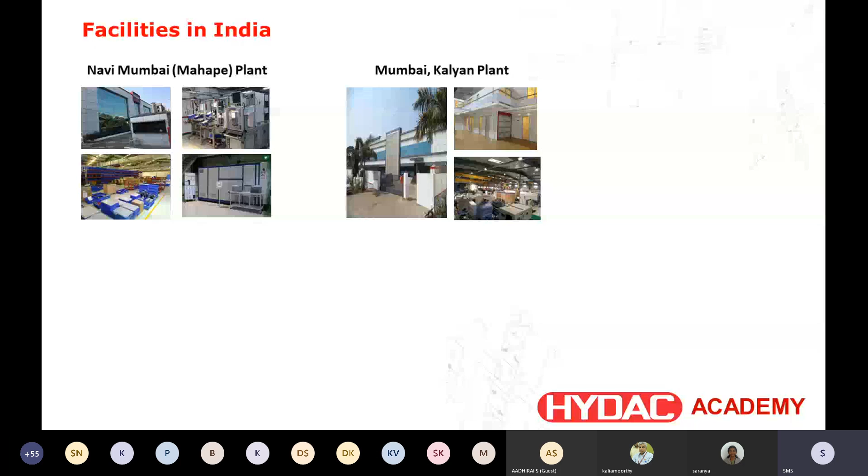So as I told, we have got 5 manufacturing plants. Out of which two are based in Maharashtra, that is in Mumbai, and we have got one manufacturing plant in Bangalore which manufactures a particular component alone, plus two more plants we have in Coimbatore.

So one plant is completely functional. The other plant was supposed to be inaugurated by mid of 2020, but due to the ongoing pandemic we have slightly delayed it. Probably by the fourth quarter of 2020, this plant will be inaugurated, which is the biggest plant for HYDAC in India.

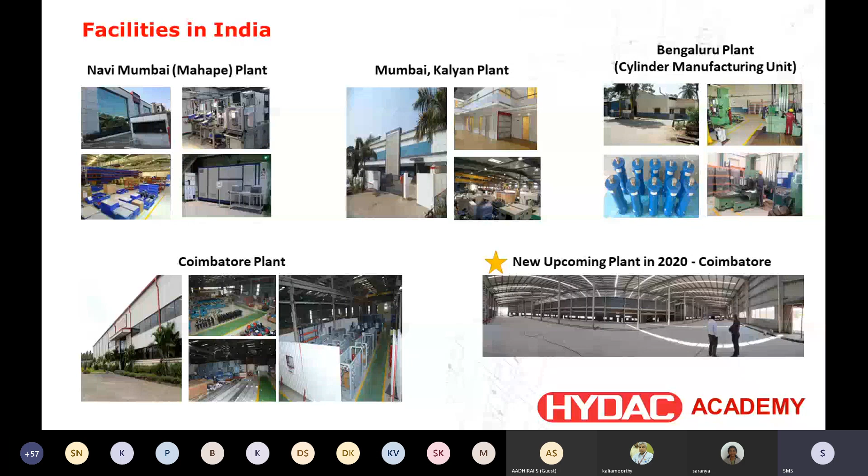So HYDAC Academy, when we say this, we are catering to various training aspects, whether it is for industries or for engineering colleges and universities. So we have come up with some very unique concepts where the basic technologies are most required, but at the same time these basic technologies should be scalable to the present generation technology, which is Industry 4.0.

So we have come up with training systems for Industry 4.0. At the same time, we are also converting the conventional training systems to Industry 4.0 as well.

So now let us get along with our topic. Today's topic is emerging trends in automation technologies. The word automation has got huge sub-branches under it. So what is basically automation?

If I have to tell this in a very simplified way, industrial automation is the use of control systems. When I say control systems, this can be a lot of other components which cater to the automation industry, just for examples like a computer or a robot or an IT platform and various other technologies which actually do the work. So when I say do the work, it can be something like your hydraulics or your pneumatics or your electrical actuators, which can be your motors or linear motors, solenoids, and all these things. So everything put together.

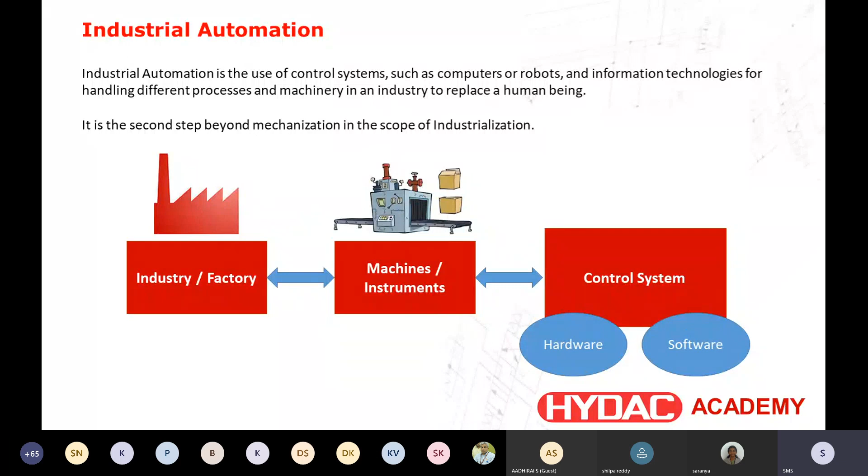So a machine with a control system in which different technologies are combined together to do a particular task, we can call this automation.

So there are different technologies which are contributing to industrial automation. It's not that Industry 4.0 is the present trend and that is the only one ruling the automation industry. There are various different technologies contributing to industrial automation, out of which very few I have listed here. One is hydraulics, because our company manufactures that and need to mention it, and at the same time, this is one of the technologies used predominantly in engineering companies.

So hydraulics, then in the same lines, we have got pneumatics, which again some dedicated applications can be done only through pneumatics. So there we need this particular technology. And finally, electric drives and controls.

So it can be one or two of these technologies combined together, which creates an industrial automation, or it can be all the things put together onto a single machine where a superior control could be something like a programmable logic controller or a SCADA, which can further control the hydraulics or pneumatics. So everything put together caters to a bigger role which is called industrial automation.

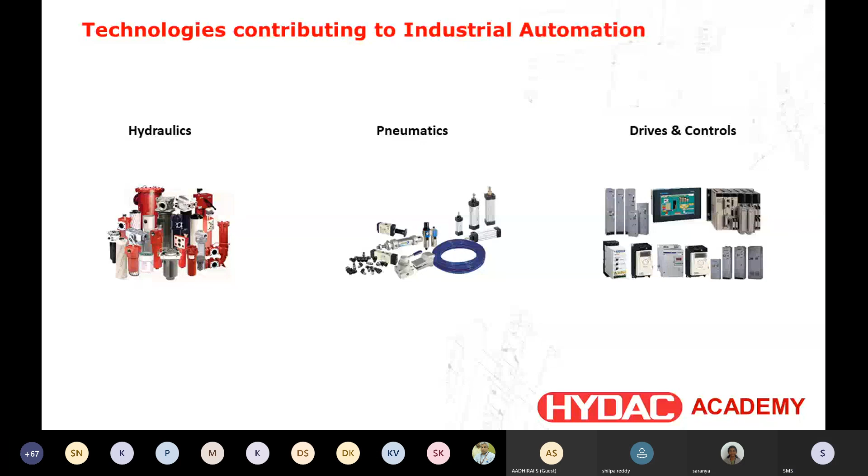So just to give you an example, I have taken one example here. In the starting, since the inception of a technology like hydraulics, it all started with something called manual hydraulics. So even today, if we go to some shopping malls or wherever you have multi-story parking, you go and park a car and the operator pulls a lever or something, and your car can be lifted up.

So whichever is operated by hand, such kind of hydraulics were called manual hydraulics, and this has been in existence since 1.5 centuries ago. So it started doing the work where people used to just operate a lever and we could lift a huge object.

So over a period of time, there was introduction of electrical technology where people started using electrical technology for operating these valves instead of having a manual lever. So earlier it was done by hand, now it used to be done by some electrical technology like solenoids.

So instead of manually pulling a lever and pushing a component internally, we started using solenoids where we could power the solenoid electrically, and the solenoid used to convert this electrical power into a linear motion and do the work for us. So this is the stage where we could do a sequential process by having a relay logic or control circuits or logical circuits. Using this, we could wire up everything, and just by the press of a button, I could run a sequence of operation on my machine.

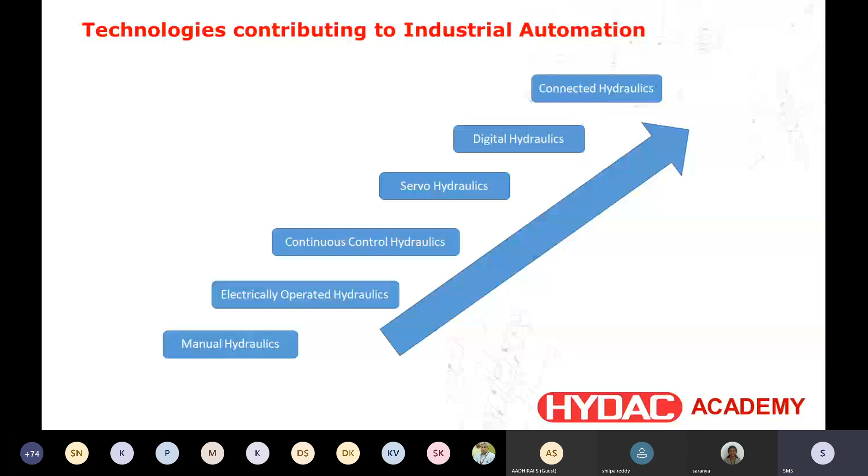So PLCs in the present generation, when we are talking about connected hydraulics, we are talking of programmable logic controllers which can be programmed in any of the languages - C, C++, Java, LabVIEW, and all these things. At the same time, they can also communicate in higher level programming languages. So it will not be mandatory in the future that you need to learn PLC programming or structured text to program a PLC. If you're good with your IT skills like Java or C++, then even PLC is within your reach. Every technology has been growing since its inception.

Now this is a very interesting topic - when we take different sorts of industries, the present myth is that hydraulics is very old, it's sluggish, so we don't use it anymore, or pneumatics can be replaced by electrical, but every technology has got its salient features, due to which almost every industry has an existence of various different technologies.

However, we are still resistant or hesitant, or due to some other reasons, we are not able to incorporate the latest technologies. Though we are quite knowledgeable, we are doing this job for other countries, but when it comes to implementation in our own country, it's a bit difficult. One of the prime reasons is the initial costs.

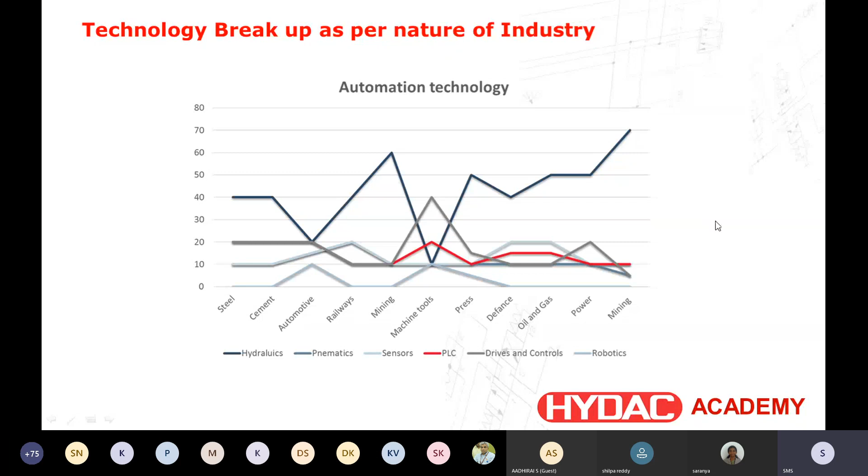But at the same time, whether we take hydraulics, pneumatics, or electric drives and controls, the share of software is increasing day by day.

So the skill set requirement in the future - an electrical engineer may not be sufficient, but an electrical engineer with some programming skills or additional software skills would be a basic requirement in the future. And that is quite evident because this particular FDP is also on IoT, which is the future trend and technology itself.

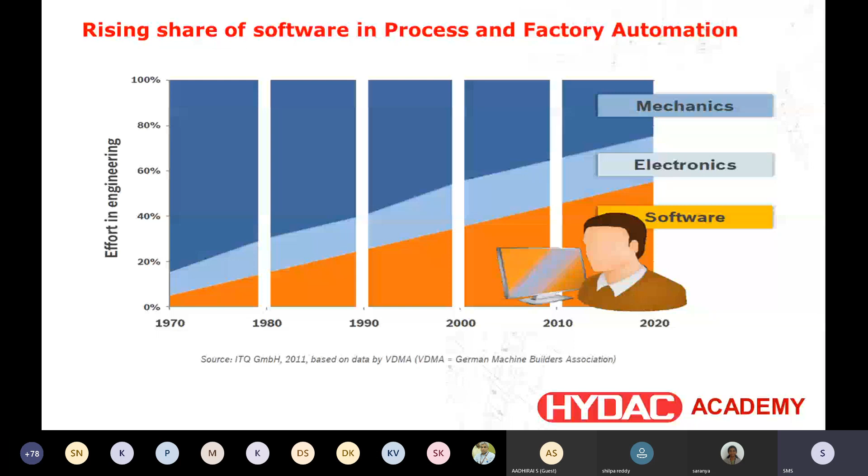Way back in 1995, there were around 40 million connected people across the globe. Internet was introduced somewhere in the early 70s and 80s. Since then, people started connecting to each other through communications via email or on social networking platforms. So in 1995, there were around 40 million connected people across the globe.

And this number is now 7 billion connected people. We have got more social networking platforms, more means of communication, more information being exchanged. So we have got around 7 billion connected people. This is on the social side, where we started connecting.

But at the same time, when I look at devices - in 1995 there were around 6 million computers on the internet which had access to data and could exchange information. It was only computers. Whereas by 2020, this number is going to be drastically high, almost up to 50 billion connected things. This is only because of Internet of Things.

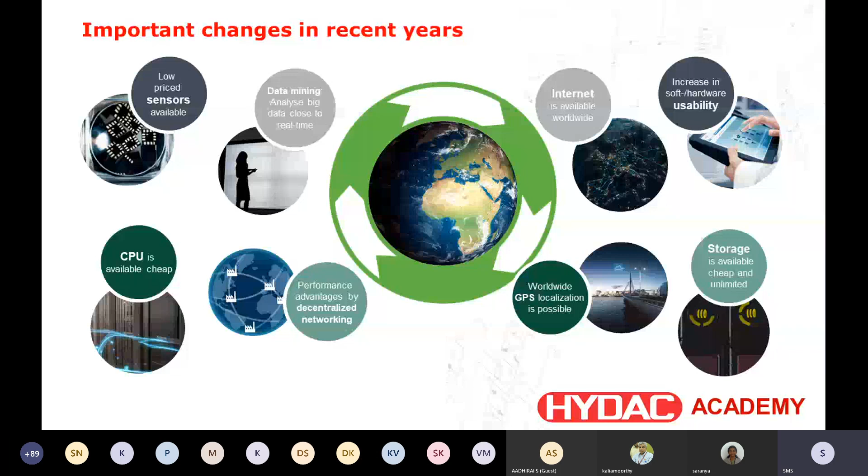We've all been talking about Industry 4.0, which is the next, or biggest revolution in industrial automation. At the same time, it's one of the most emerging fields for Industry 4.0 or industrial automation. So if this is the fourth industrial revolution, then there should be the first three industrial revolutions also.

The first industrial revolution was way back in the 18th century, where invention of steam was being utilized to do some mechanical jobs like steam engines, steam turbines, and a little bit of hydraulics was being utilized. During that time, we used to use water as a medium to operate some things. So this is referred to as Industry 1.0.

But believe me, there was no Industry 1.0, 2.0, or 3.0 unless or until Industry 4.0 came into existence. So when we only started thinking of the next generation of automation, then we named it as 1.0, 2.0, 3.0, and 4.0.

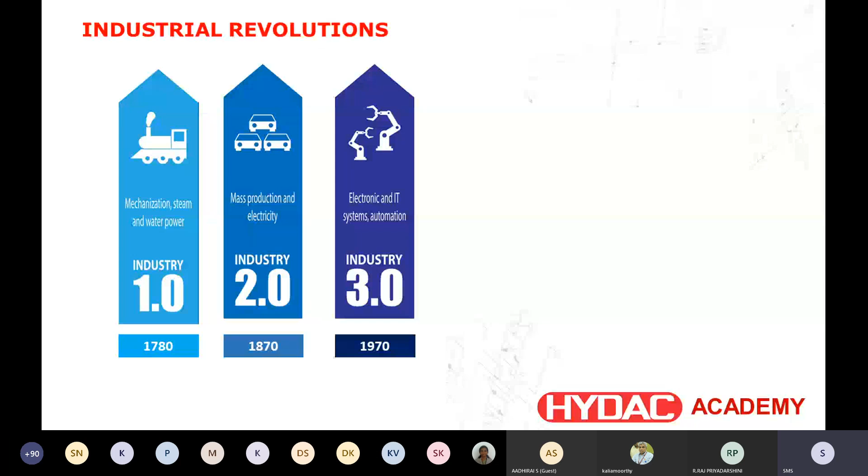But after this, somewhere in 2008, during this time smartphones had become popular, Google had become very popular, data exchange and ease of everything was happening. So big industries came together and started saying that we should bring this concept of IoT into industry, so where we could connect machines and companies together on an IT infrastructure. So that is where Industry 4.0 came.

As I told you, this was coined in 2008. However, this became reality since 2012. And today we are in a far more superior position since the inception. But believe me, till date we are still learning and implementing new things. So this technology is not something that came and will perish within the next 5 or 10 years. This technology will grow and evolve over a period of time.

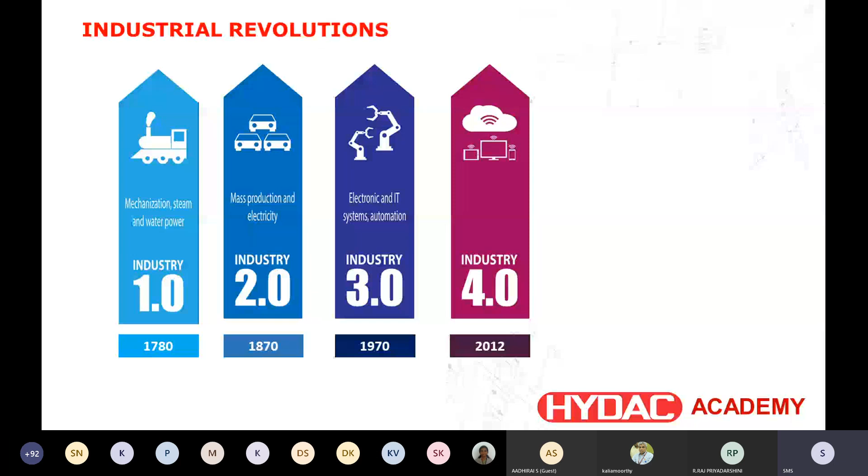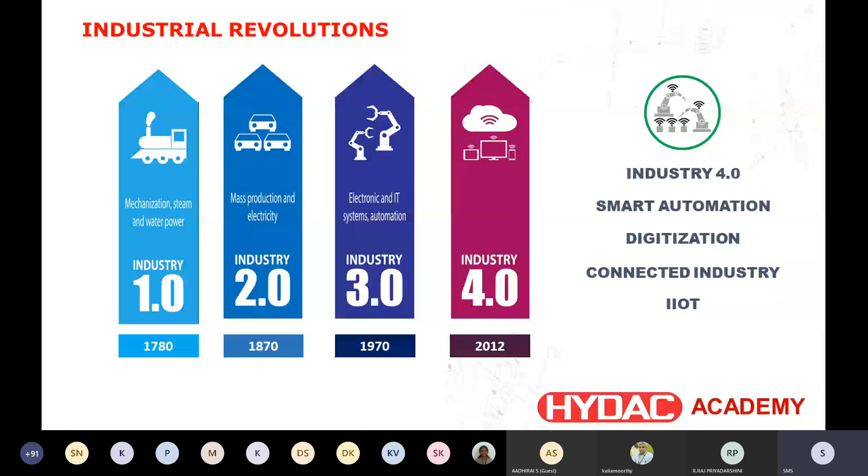So exchange of information, exchange of data, machine to machine communications, everything started happening with this. This has been given different names. Especially with the European countries, they call it Industry 4.0. Americans call it smart automation. A few others, in a generalized way, call it digitization. Appropriately, it is called connected industries or IIoT, which is Industrial Internet of Things.

So everybody says it's the fourth industrial revolution. Now, when I consider the year 2012, everybody said it's still Industry 4.0, the fourth industrial revolution. But the biggest question was whether it's a revolution or an evolution. Actually, it was both.

It was a business revolution. It was a concept to sell easily. When I could say that your machine can be switched on from your home, or you could see how many components are produced sitting somewhere, this was easier to sell. But at the same time, when the concepts or products come into picture, it was an evolution, because during that time there were no clearly defined concepts, nor did we have products. So this all evolved over a period of time, now.

A very simple definition of Industry 4.0 is people, machines, and IT systems. So unlike conventional automation, it is not only the machine. Here we are talking about machines, IT systems which is your software part, and human beings, automatically exchanging information. So it's not only machine to machine communication, but machines should also communicate to human beings through an IT platform. So all communications are possible - people, machines, and IT systems automatically exchange information for manufacturing a product.

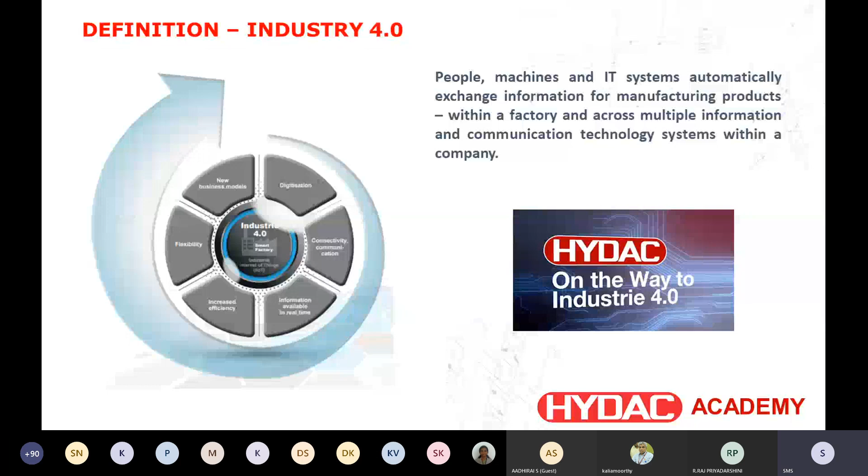To simplify this, it's a combination of industry and IT put together - we call it Industry 4.0. It's not always IT when we talk about Industry 4.0, but there are very important technical aspects of the industry, and at the same time a lot more requirement from the IT industries.

Just to name a few, when we talk about industrial machines, our utmost priority is safety - safety of the operator who's operating it, and safety of the machine itself. Next is time to market - how quickly I can conceptualize a new product and how quickly I can bring it to market. Energy efficiency is utmost required, and productivity has to be improved, quality has to be improved, and life of the components has to increase with Industry 4.0.

At the same time, when we talk about IT, we've already spoken about big data - collection of data. Then networking, artificial intelligence and machine learning we've spoken about a bit. At the same time, it should be safe and secure. In future, probably competitiveness will not be on the price front, but from IT infrastructure safety. At the same time, cloud computing becomes very, very important.

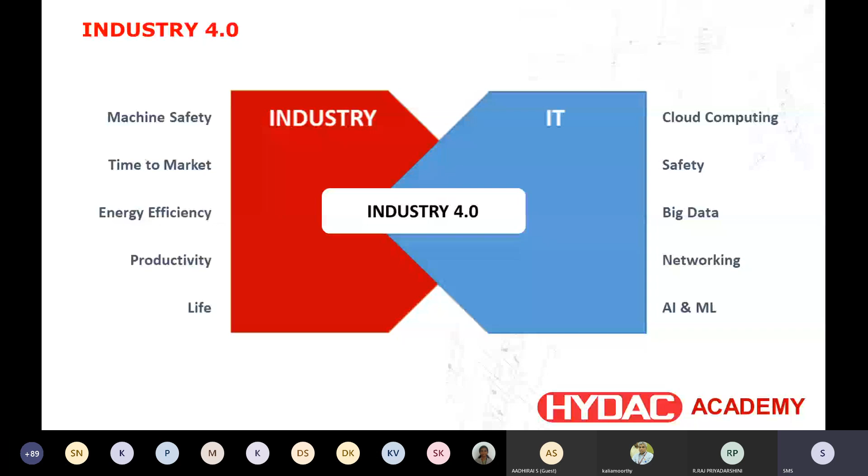Under all these areas, there are a few technologies catering to the automation industry in a drastic way, which are all part of Industry 4.0. The first thing is autonomous robots - your robots and control systems have become quite intelligent.

Just to give an example, in an automotive manufacturing plant, let's take the Maruti Suzuki plant. Earlier we used to book a Maruti car and wait 6 months for delivery. But in the present generation it's all quickly possible, because if I go into the Maruti manufacturing plant, the first car getting manufactured on the line is probably Ertiga, the second is Baleno, the third is Vitara Brezza. This is because your robots and processes have become smarter - the machine will identify which chassis is coming and automatically knows what to do for Baleno, what to do for Vitara Brezza, and so on. All this has now become possible because of Industry 4.0.

One more very important and critical thing is cyber security. When you have your complete manufacturing lines, people's planning, designs, programs - everything on an IT infrastructure - your cyber security has to be highly encrypted and secured.